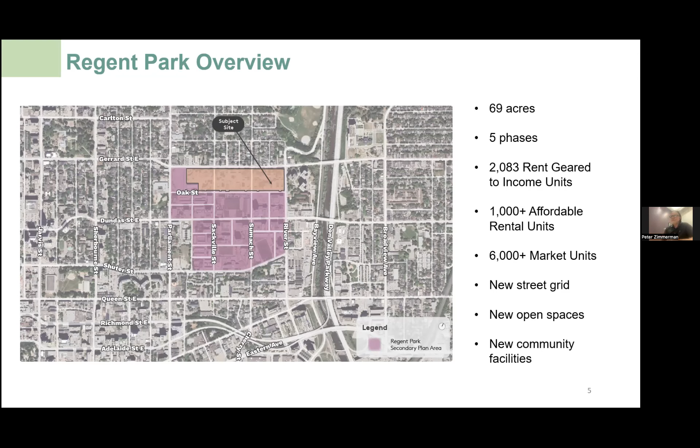So just a quick summary of the history of Regent Park. It was old Cabbagetown, South Cabbagetown, prior to the initial redevelopment, and it was part of a slum clearance program. The idea was to raze all of the existing housing and build this new community.

It worked well for many years, but by the 1970s we started to see social problems arising in Regent Park that became increasingly pronounced moving into the 1990s. I'd note that the whole effort and interest in revitalization and renewal of the housing in Regent Park really arose out of the tenant community themselves.

There were groups within Regent Park already talking about replacing the existing housing with new construction, but very important to the residents was the idea that there was a strong community here. There was a group of tenants working together who wanted to stay in the community and be part of this redevelopment effort. I think that spirit, articulated by tenants in the 1990s, is what informed the revitalization work we did moving into the 2000s. It's a really important part of that story.

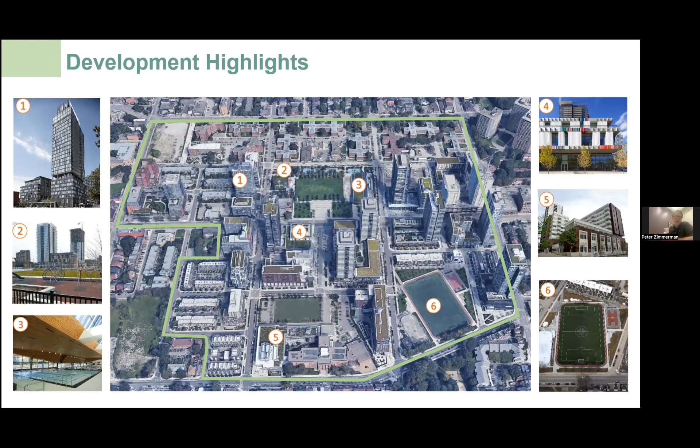This speaks to opportunities that presented themselves as we started down the path of revitalization. There was not a significant athletic facility in Regent Park as part of the original plan, but MLSE, the company that owns the Toronto Maple Leafs, Raptors, and TFC, was so excited about the work we were doing in Regent Park that they wanted to be part of it, wanted to make a contribution, and made a significant contribution for a new athletic facility. So the plans were actually changed mid-course to include this new athletic facility as part of the revitalization effort.

Phase 4 and 5 are the final two phases of Regent Park. That's what we're working on right now. One of the things we determined early on in the planning of phases 4 and 5 is that we were going to revisit the master plan.

Densities have come up in the city, and again there were other opportunities that presented themselves. One is there was a request by Toronto Public Library to find a site for a new significant branch somewhere in and around Regent Park. So we redesigned phases 4 and 5 to incorporate the Toronto Public Library as the center hub of a new civic square. You'll see that in a moment.

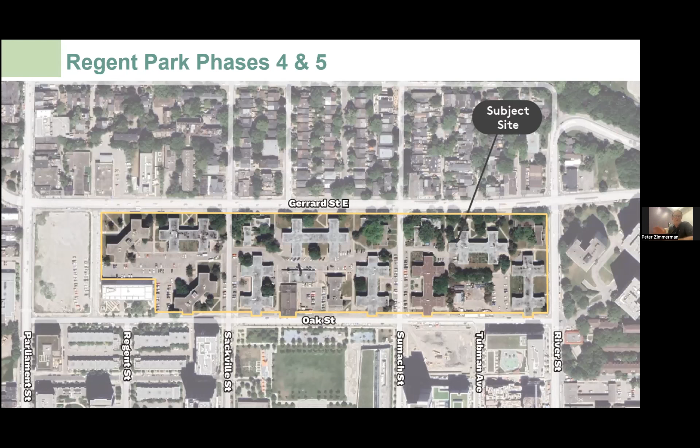So in response to opportunities, wanting to increase densities, wanting to increase opportunities for new affordable housing, we decided to look at a very significant rezoning of phases 4 and 5. This is what the plan looks like now. This month we're really excited that we're going to be at Toronto East York Community Council with the rezoning.

This has been done in 14 months. Again, hats off to our colleagues at the city who worked very closely with us to get us through rezoning in Toronto in 14 months. It's pretty extraordinary.

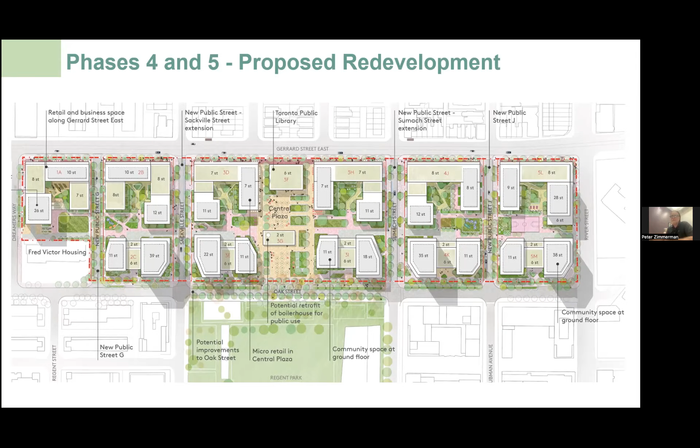It is a much higher density. We've gone from low rise and mid-rise to a mid-rise and high-rise built form. We've increased the number of housing units by over 1,000. 550 of those new units are going to be affordable rental units. We've created this new civic plaza that's going to have community economic development opportunities around it, and this new Toronto Public Library. It's also going to be a sustainable neighborhood.

As I said, we take the Toronto Green Standards we're operating within very seriously. We're looking at how we introduce ground source heat pumps into the system, how we tie this back into our existing district energy system and help green it. The buildings and placements were designed to maximize sunlight into the new homes, and the courtyards are providing opportunities for community gardens.

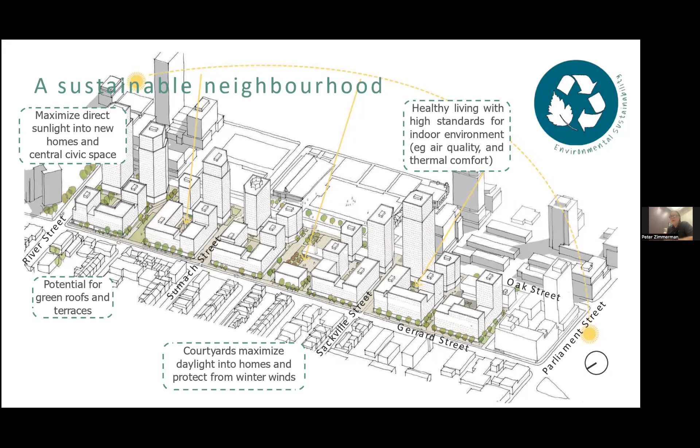Economic development, I touched on. I'm going to try to wrap this up fairly quickly. The money we're able to derive from the private development partners allows for training programs, event funding, space for community groups, and local employment initiatives. Part of this plan for phases 4 and 5 is $26.8 million in community benefits.

We're in the middle of an intense engagement process with the community to figure out their priorities. And then it's going to be incorporated into a public agreement between Toronto Community Housing and Tridel to ensure that money is directed exactly where tenants in Regent Park want it to be spent.

So our lessons: adapt, remain flexible, embrace opportunities, mix at different scales. We have market housing, affordable rental housing, RGI housing, and all this new retail and community services. Extract as much community economic development as we can and work very, very closely with the community throughout the process. And that's it. Thanks.

I'm Alex Taranu. I'm an urban designer, planner, architect. I like to call myself an urbanist. I worked the last 20-some years in the city of Brampton in a variety of positions. Right now I'm senior advisor, urban design, in the environment and engineering division of the planning department.

I was involved with the project I'm going to speak about since 20 years ago. It's very different than the one you just saw, Regent Park, because it's at the edge of the city. I was involved with the project as manager of urban design at the time, but some people also know me from my advocacy role with a number of organizations, with CAP, with RAC, with CANU, the Council for Canadian Urbanism, and so on.

I had the opportunity to lead tours for people coming from many places to Mount Pleasant, and I'm very pleased to be here. The last few years I was particularly focused on sustainable development in many aspects: sustainable infrastructure, resilience, healthy development, and so on. I'll try to be brief.

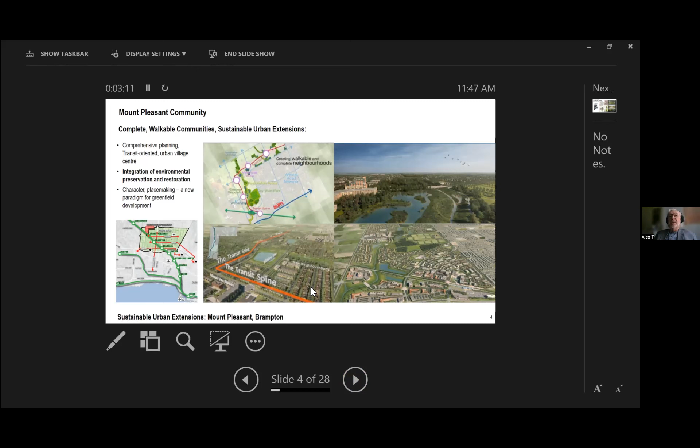It was developed from the outset to have this comprehensive planning process, to have transit-supportive, transit-oriented planning, to have a strong urban structure. You see here some of the initial vision images that came to life, sometimes even better than we thought. It was planned as a complete sustainable community.

It had a strong structure with a center around the GO station, continuing with the main transit spine - those red points are the main transit nodes - and also along the green spine, which is the natural heritage system we managed to build. Along the way we integrated active transportation, stormwater management, what we call nowadays green infrastructure.

It used innovative planning and design process tools, and it was done in partnership. In fact, the residential component was done by private developers, and the government and the city did the amenities. In terms of infrastructure, we partnered all along.

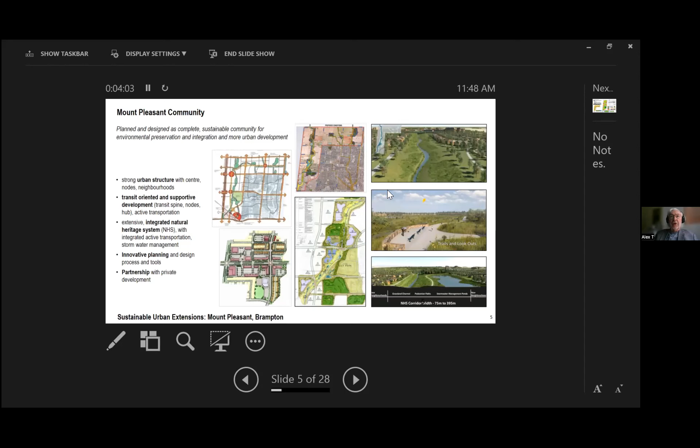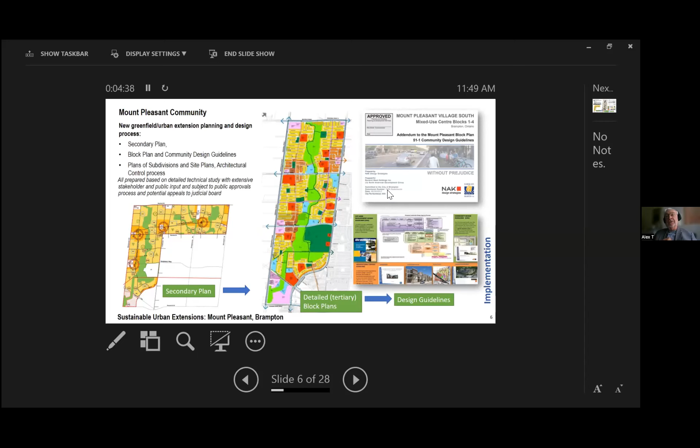These were the initial concepts of what we call the secondary plan, which is the statutory planning process in Ontario, but we went at a different level with very detailed urban design focus, infrastructure-focused block plans as a kind of tertiary plan. That's complemented by strong urban design and community design guidelines, down to the process of plan of subdivision, site plan approval, architectural control, and design review on many aspects of the community.

One of the very important elements of this was the green spine, the so-called natural heritage system, planned over many years by a set of consultants working with the conservation authorities - Credit Valley Conservation - and the developer, integrating man-made elements.

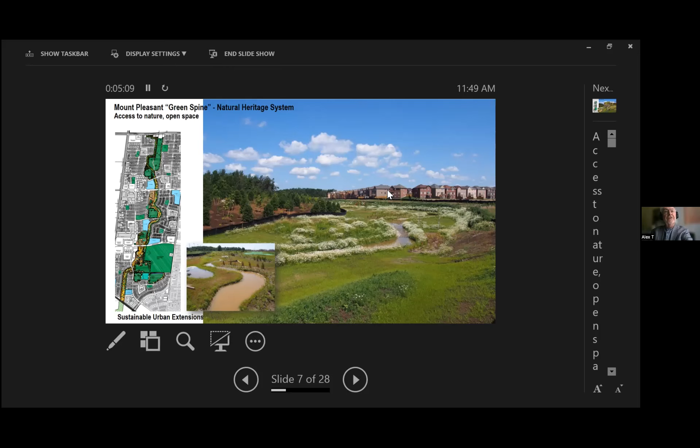This was just farmers' fields for many, many years, probably 150 years or so. We recreated the watercourse, recreated wetlands, integrated stormwater management, and preserved woodlots. Those are early images from 2011 when this was very new.

Now, to show you - if you go there, you might think you're in Northern Ontario, or North Bay or somewhere. The way nature really takes over - we just created this framework, and it's aging extremely well.

Many people don't realize this is in fact man-made, on former farmland, and it helps clean the air, helps clean the water, including in the wintertime - that's the wetlands aspect. There's wildlife, there's habitat, and of course there's human habitat all around.

One of the key aspects was the community transit nodes. We didn't even dare to dream too much of apartments, mid-rise and high-rise buildings, but the market showed yes, there is a market for that. Nowadays we have one of these nodes in particular with 4 to 8 stories up to high-rise level.

All of this driven by transit access and active transportation. In terms of livability, you have an image here from the natural heritage system towards it - very highly livable. Unlike many other suburban places, from the outset we wanted a very strong emphasis on urban design, placemaking and character.

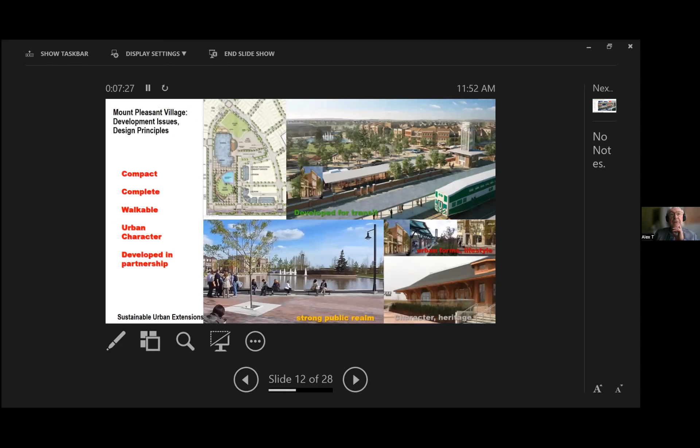A little bit about the village itself. I'll try to be very quick through this. Compact, complete, walkable with urban character. Those are some of the initial renderings, and it was built very much the way it was anticipated.

In order to make this happen, a very unique transit-oriented development in Greenfield, I'd say across the continent, not just the country, you need a strong vision, planning, design including design review, funding, controls over the phase, construction, operation, maintenance, a continuous loop to update, strong engagement, and definitely partnership. This was done mostly with Mattamy Developments.

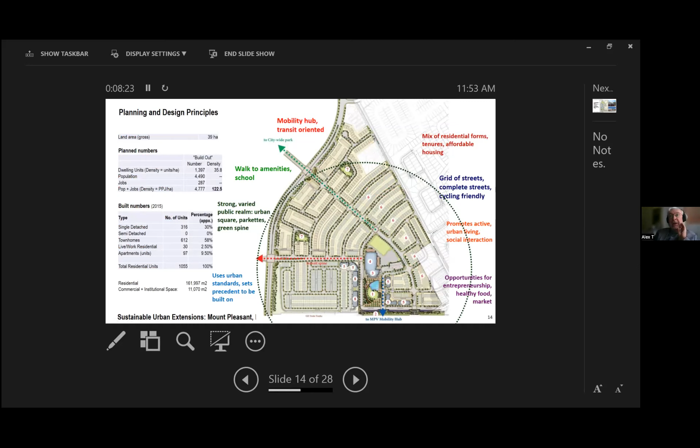Almost in its entirety, it's a combination of the radial plan, where everything leads towards the mobility hub. And then you see some of the elements. In this case, we went well above the provincial guidance at the time, to 122 people and jobs per hectare, as opposed to the 50 to 70 that was originally in the plan.

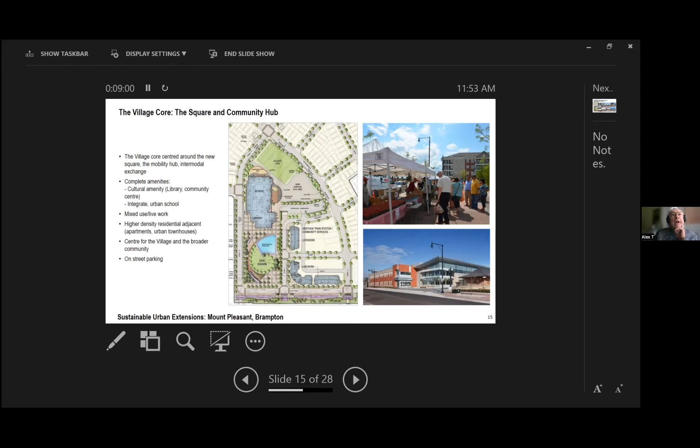At the core of it is the square and the community hub. In fact, at the core of the whole community is this combination of the square itself, public amenity, and a partnership between the city and the school board to create this community hub of library, school, and fields, with a lot of savings for the taxpayers, and a lot of working together in terms of access to amenities and access to programming. Part of that, we have a very strong focus on the programming of various urban spaces.

This one in particular was subject to activities such as markets and many others. I'll show it in a minute. But at the core of the core is the mobility hub, the transit amenities.

They include the regional GO Transit, which became recently not just a terminus but a very important intermodal exchange, combined with higher order transit of the city, with local transit, which keeps expanding. In fact, by now it's probably 4 lines there.

Everything combined with active transportation for the last mile or kilometer, parking management, and public design that facilitates this.

GO also did a recent service expansion for all-day service into the weekend, and they're working on the third rail line with more frequent service by 2028 or so. We don't know exactly when, probably 2028 at this point.

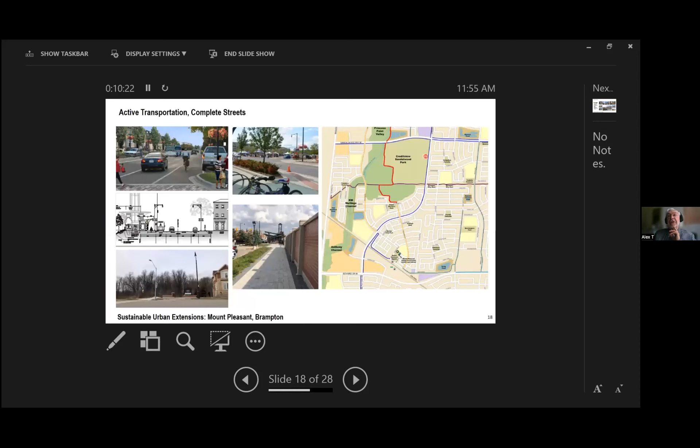Active transportation: the first complete street, a new complete street in Brampton, and the whole network.

In terms of housing and built form, this was market-based affordability, but with a variety of housing forms, quite affordable at the beginning. As time goes on, with the whole market, prices went up, but live-work, mixed use, lane-based housing, townhouses, a variety of them, and apartments, were quite challenging.

In terms of character and identity, I mentioned a bit about the heritage component — in this case, the rebuilt train station from downtown Brampton. A very interesting aspect here is a former church that's been converted to a mosque and cultural center, as an addition to respond to the very diverse population of Brampton, and everything complemented by this railroad heritage theme in terms of public art interpretation.

I mentioned a bit about the programming. The market was very successful, and we still work on that. Winter programming — a lot of new residents of Brampton learn to skate in Mount Pleasant, working with the school. Some of the advocacy work we did included a video to introduce new residents to this neighborhood, with the whole idea that public realm brings everybody together.

In terms of sustainability, from the beginning we had our own system of guidelines and measuring sustainability of new development, where Mount Pleasant Village scored extremely well. This also included healthy development work with the Region of Peel public health.

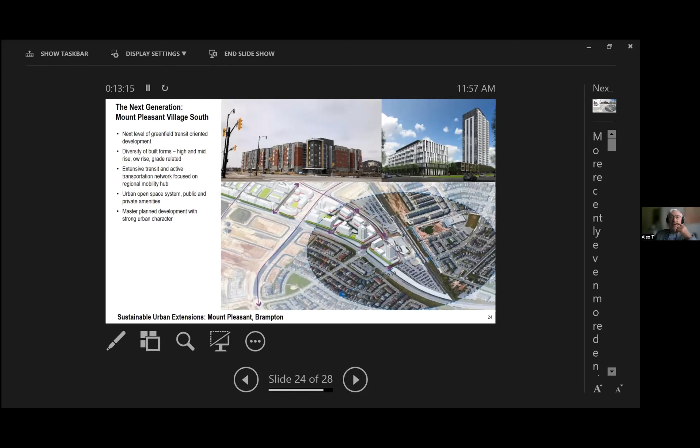To wrap up quickly about the latest, which is just coming right now, the Mount Pleasant Village, the south part that was a bit undecided at the beginning, but had opportunity to intensify to the next level. The first thing was the mid-rise developed by Mattamy Developments, and then we kept updating the master plan for this area with the guidelines, and this is what was envisioned a few years ago. And now the reality is even better than what we expected, with Daniels' developments, two phases.

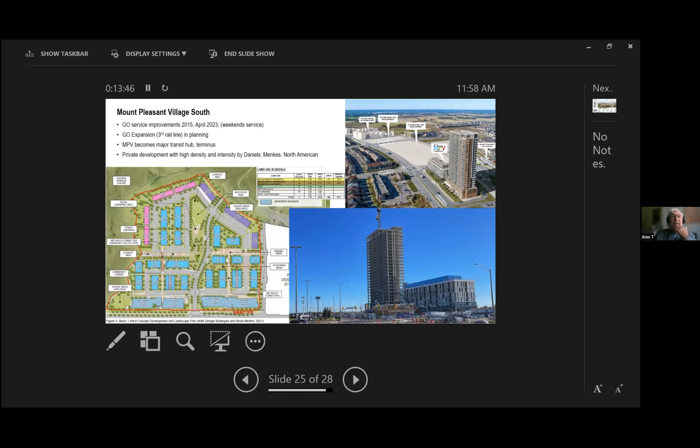One of them, this photo is from November, but by now it's probably enclosed, and it has all the aspects, including ground source heat pumps and rental affordable housing with some funding from the federal government program. Now they're going into the next phase that started. It's finalizing the development, and it's very exciting to see this happening. It's a community within walking distance to the core, and it has all the elements of low carbon living. And you have here some of the data.

And to conclude, going back to SDGs, we believe that this fits extremely well in Goal 11 as well as others. I mentioned some of the aspects that we think Mount Pleasant community as a whole builds very well in terms of affordable housing, accessible to sustainable transportation. Public transport was key from the beginning. Inclusive, sustainable urbanization, dealing in some aspects with water-related potential, the floodplain and the area, reduce the adverse impacts. Right now we work to gather a lot more information and data about this in the context of some other work the city is doing to advance the sustainability scores to the next level.

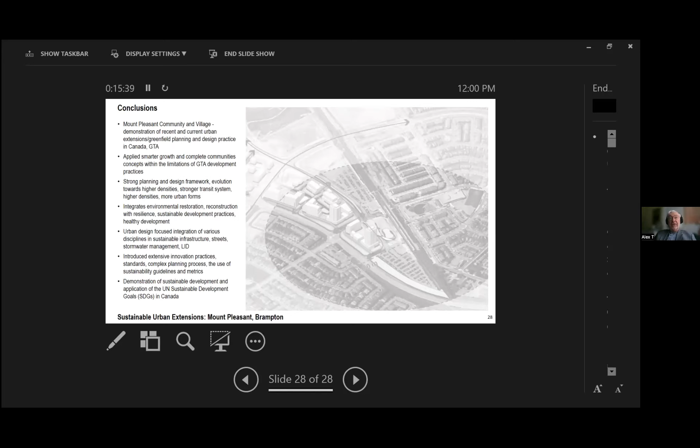Universal access is very important in terms of the diverse. And then obviously the last two are very important in terms of using this change and development as an engine for more sustainable change. And those are my conclusions. I believe this is a good demonstration of the practice in Canada, applying smart growth, complete communities concept. It has a strong planning design framework, integrates all these aspects, environmental restoration, reconstruction, and focuses on a variety of disciplines. We all work together. It's a huge team: sustainable infrastructure, streets, LID, stormwater management, extensive innovation and practices. And at the end, it's a demonstration of the SDGs.

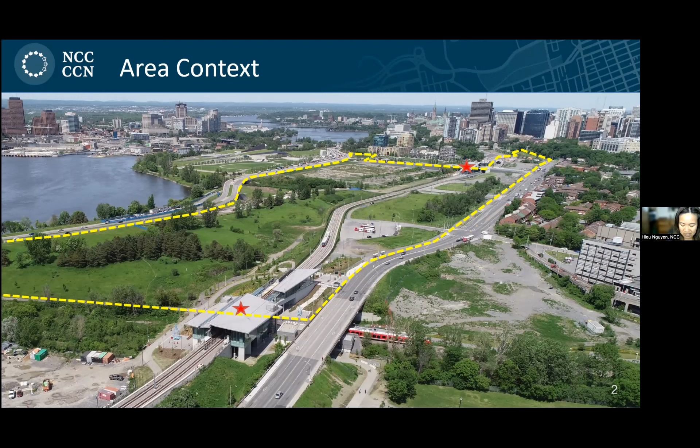As they re-approached how they're going to redo LeBreton Flats, they took a different turn. They decided to create their own master concept plan, updating the Flats master concept plan from 1999. It was also decided that the site would be developed by phase or parcel, so if one site didn't go through or was sold for some reason, it didn't block other sites from getting developed.

Two years later, in 2021, after an extensive consultation process, we have a finalized master concept plan. It's to be a net zero carbon, compact, high density mixed use community supported by active transportation and transit. There's a dual purpose of this plan: for LeBreton Flats to be a destination and place of pride for all Canadians, which is part of the mandate of the NCC, and to be a sustainable and inclusive community for local residents.

The plan is structured around seven strategies, including parks and public realm, mobility, land use, built form, and sustainability. Within our sustainability plan, there's a commitment to net zero carbon buildings. There's also a culture and heritage strategy, and housing and affordability. Within our housing and affordability plan, there is a commitment to 25% affordable housing for all residential units and 15% of overall units to be family units.

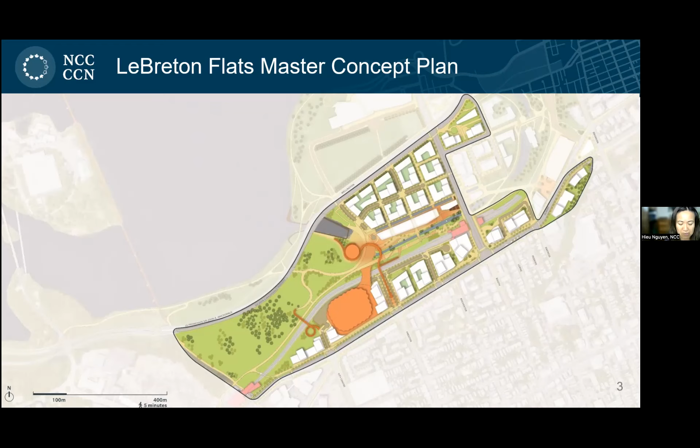The plan provides for flexible development targets over a 20 to 30 year period. Within the plan, it's 12.5 hectares of parks and open space, that's 43% of the site. There is 520,000 square meters of overall gross floor area, 4,000 dwelling units, 7,500 new residents, and 3,750 jobs post-construction.

The plan is built upon seven guiding principles, which anchor our approach to the project in terms of how we design and implement our work. They're listed on this slide here.

The last chapter of our master concept plan is titled Achieving the Vision. This is an overview of our implementation approach and our phasing strategy. The section includes targets which we report to the NCC board on an annual basis. In terms of the master concept plan itself and why it's important to have a current master plan, it's really to set expectations for developers from the start, for example design requirements, and also to have current policies incorporated in the municipal planning framework, for example maximum building heights, as the development process is regulated by the municipality, in this case the City of Ottawa.

This slide shows our phasing strategy, showing our proposed parcels and sequence of development in the plan. The build out plan is for the next two to three decades, and the map is shown by early, middle, and late phase, with each phase representing a decade. The red parcels are the early phase, and we already have progress in three of those areas.

I'll be speaking in more detail on parcel A9 and A10, if you're able to see my cursor. We refer to this area as the library parcel, as it's next to the new central library just to the north of it, which is named Ādisōke.

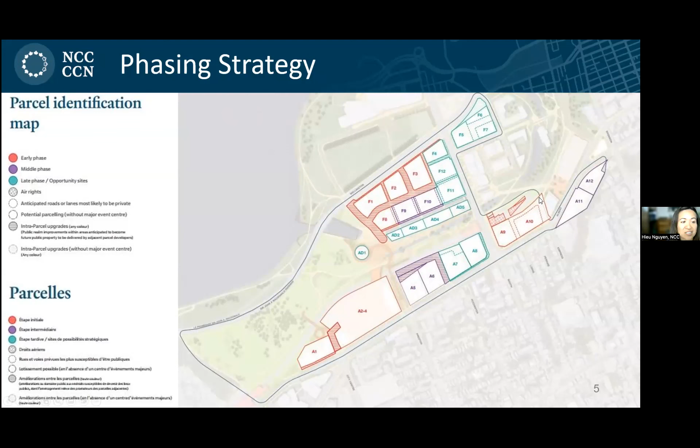For the library parcel development, it's really our first land offering under the MCP, and it was in partnership with CMHC, the Canada Mortgage and Housing Corporation, through their Federal Lands Initiative program, which I'll refer to as FLI. Through FLI, CMHC buys lands that are put forward by a federal department or agency, and then they put the offering out. They dictate how much affordable housing will be required, and they manage the procurement process for the land development. So the original landowner, the federal agency or department, is out of the process at that point.

But in the LeBreton case, since we had this new master concept plan and wanted to ensure all the principles and targets were met, not just for affordable housing, we decided to undertake a different and innovative process for the library parcel itself. The NCC managed the procurement or RFP process and developed evaluation criteria based on the targets of the MCP. The RFP itself was worth 50% of the score, while the FLI criteria was worth 50%. Combining those scores together, the proposal with the highest number of points was the successful proponent. One thing that's different in this case is that the price was already set, as CMHC had already purchased the lands from the NCC.

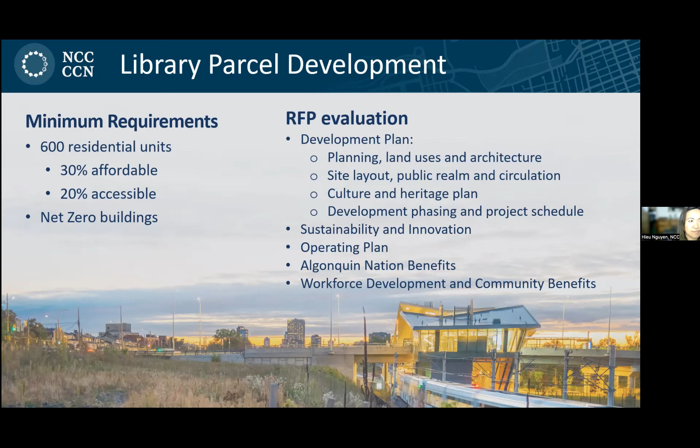The proposal is for a mixed-use development, 2 towers of 30 and 35 stories, totaling just over 600 units. In terms of the number of affordable housing units, it's 41% — a reminder that the minimum requirement was 30%. In terms of number of accessible units, it was 31%, and the minimum requirement was 20%.

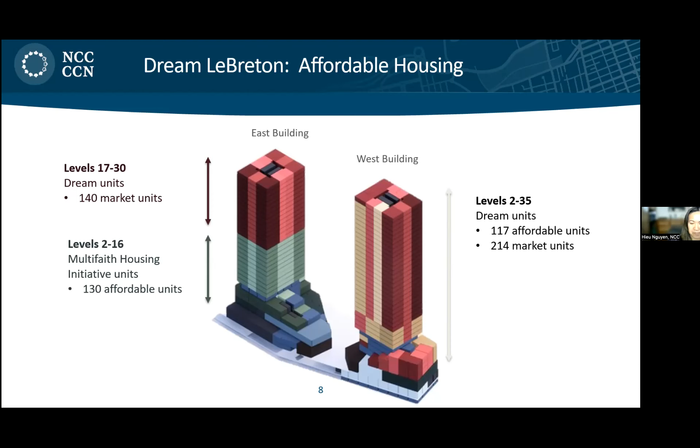There was a strong sustainability component within our RFP, and this proposal exceeded the requirements. Our minimum was that they were to certify to the Canada Green Building Council's zero carbon building design and performance standards. In this proposal, they'll also be meeting LEED Gold for neighborhood design as well as for new construction, and also looking at meeting the One Planet Living framework.

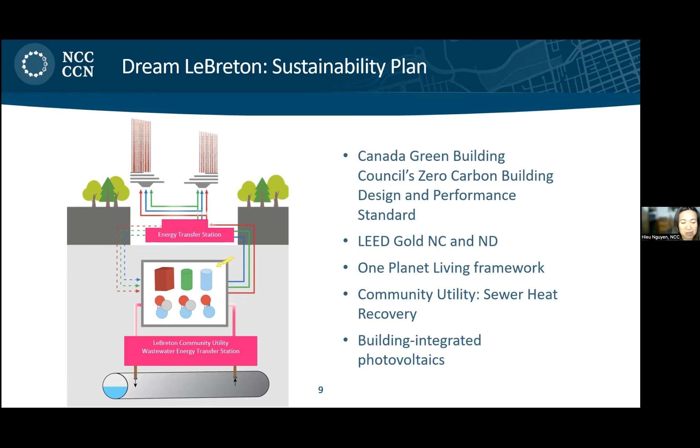Dream's net zero plan also relies on an innovation of turning the heat from sewers into energy. The site location is ideal for sewer or sewage heat recovery, as there are 3 large collector sewers coming together under this site. This is a highly renewable and dependable source of thermal energy that can provide for annual energy demand for the development, paired with the solar panels that are integrated into the cladding of the building.

Two of the other evaluation criteria were a benefits plan for the Algonquin Nation, and secondly, a workforce development and community benefits plan. We evaluated these on quantifiable outcomes — we were looking for numbers, dollar amounts for contract value, number of jobs, number of training hours, number of apprenticeship positions, as some examples of what were provided within these plans.

Sorry, I kind of rushed through this library parcel example, but I wanted to summarize the takeaways from this land offering that we did through an RFP process in partnership with CMHC. We really couldn't have done it without a partner such as CMHC. We worked closely with them, we collaborated with them. They allowed us to do this RFP process in a little bit of a different way than they normally would with a land offering. We had a set price.

In terms of the evaluation and the RFP, the proponents were really bidding on best outcomes and more outcomes than the minimum requirements. In terms of enforcement, it's really through the financing program of RCFi and how it's a loan that the developer is receiving from CMHC to ensure it's meeting its commitments of delivery of the affordable housing units. We also collected letters of credit for the sustainability plan and the workforce plan. As part of the RFP process, we also provided the draft copy of the agreement of purchase and sale. So again, this is about setting clear expectations with developers and understanding what our requirements would be.